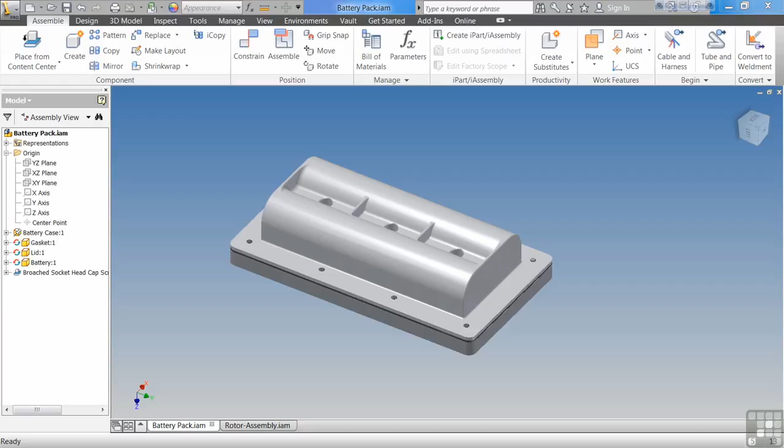In this exercise, we're going to be discussing patterning components. Let's get started. First off, I'm going to flip my battery box over here to the bottom. This is the batterypack.iam assembly drawing. I'm going to come up and I'm going to select pattern components. I'm going to select my bolt.

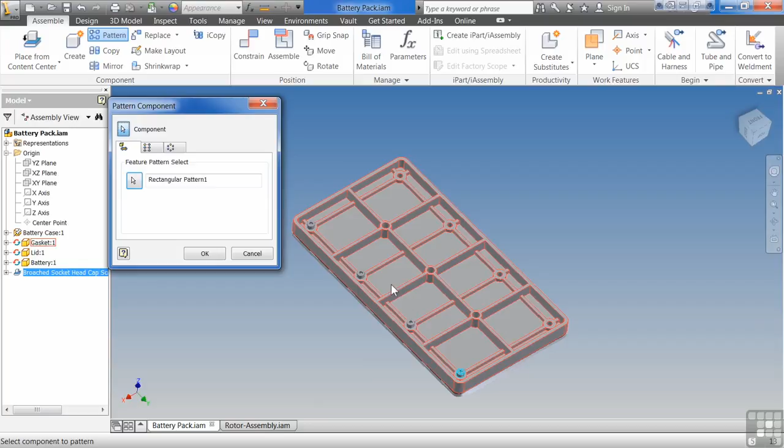Under feature pattern select, I'm going to select this arrow. And you can see it patterned this one side of the bolts. What that patterned on and what I was actually selecting was the pattern inside of this case that was used to create these holes. So it was these two holes patterned up in this one direction. You'll notice that it only did the one side.

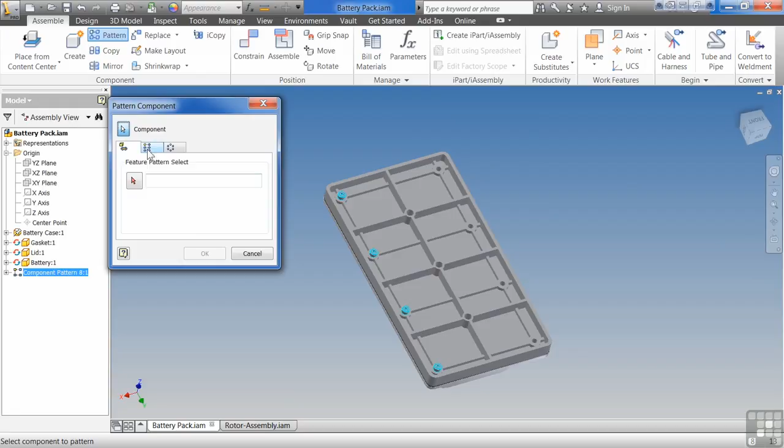Hit OK there. Go back to pattern. I can actually select the pattern, go to rectangular, select my column, and type in 3.875, and it'll pattern it over. Now, I did that to show you that you can pattern a pattern. In real life, I would have either put in two bolts to start with and pattern those, or I would have just done an X and Y pattern. What's an X and Y pattern?

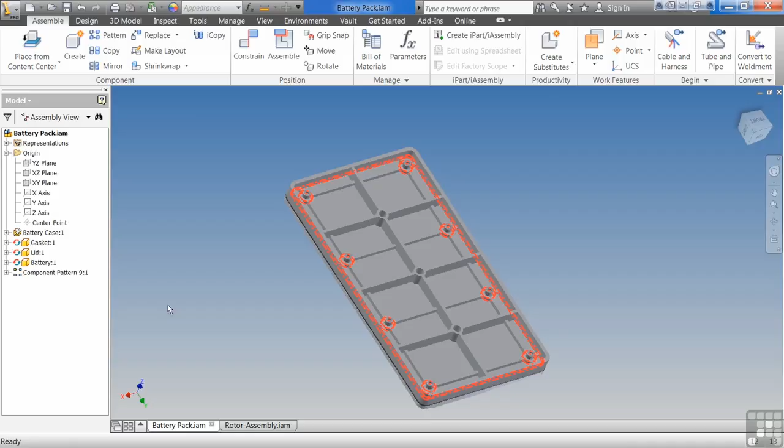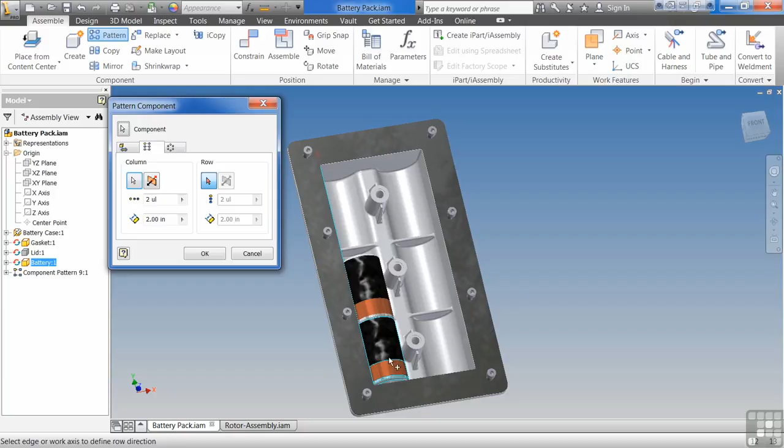Let's take a look. Turn off the visibility on the lid by right-clicking on it in the browser and selecting visibility. Let's do an X and Y pattern. Say pattern, rectangular. It's asking me for my component. Come in, I select the battery. I'm going to select the column. I'm going to go up this way, and I need 3 batteries. And I need them to be spaced so that they evenly fit in these spaces here.

But I don't know what that space is. Now I could calculate it by hand. I could go back to my original sketch. I could do a lot of hard work. But let's face it, we do CAD because it's easy. We're lazy. We don't want to have to do things. We let the computer do it for us.

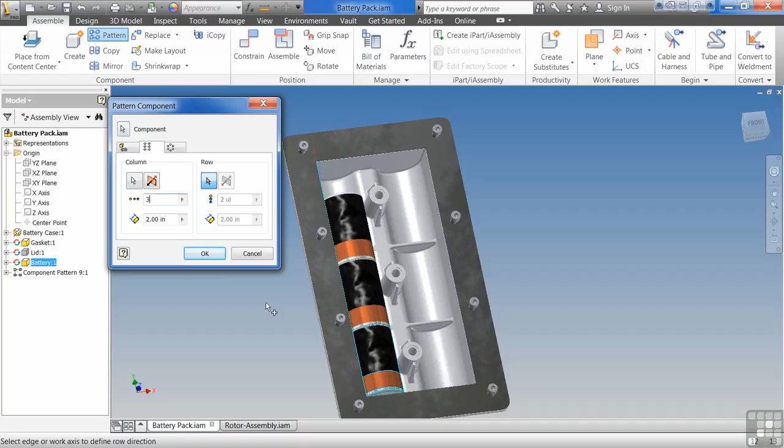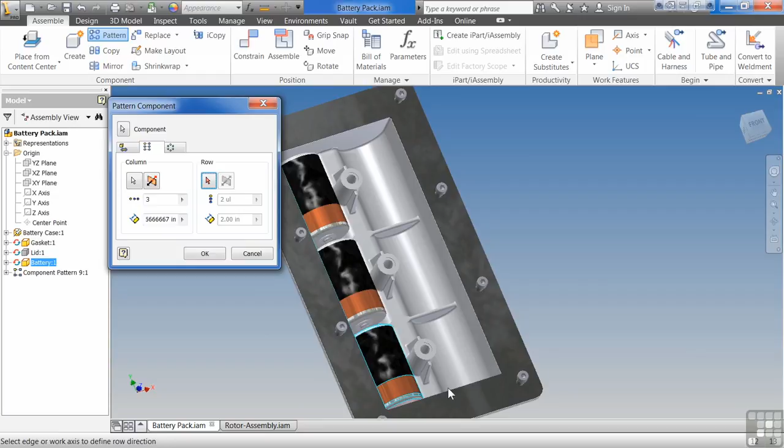Come up here, we select this little arrow, and we say measure. I selected the center point at the top of that radius. I can come over and select that exact same point up here, and then that will tell me what that space needs to be. You can see it perfectly spaced my batteries. So now I can say row, come over here. Uh-oh, went off into outer space. All I have to do is click the flip, and it'll go in the other direction.

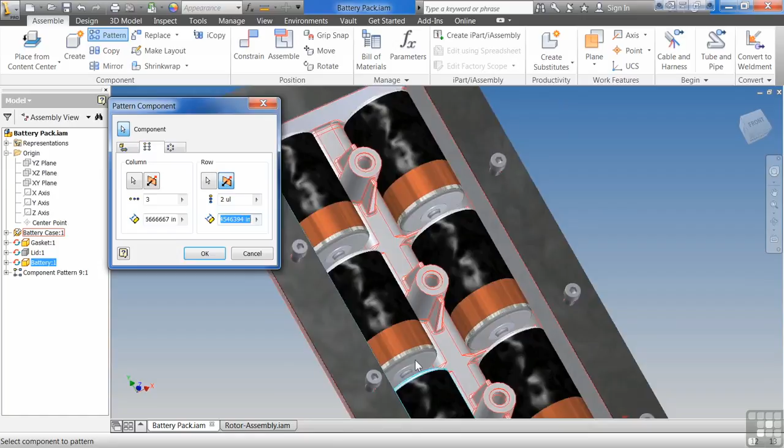And once again, I don't know what that space is, so I can just say measure. Select the top of that radius. Just make sure I get the exact same one. Really doesn't matter what radius I pick. As long as I pick the same one, it's going to evenly space them based on that. So as long as it's a like point. I didn't even have to pick the center.

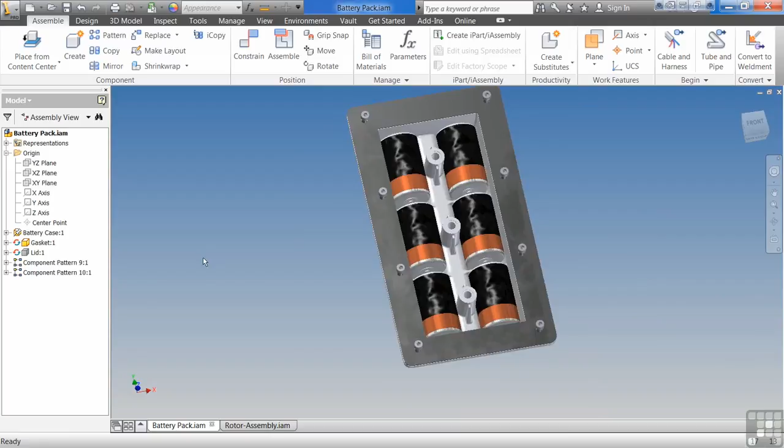I could have come in here and picked this corner here and picked the same corner over here. But I knew the centers were going to be exact. This edge here may be a little bit different than this edge over here, but the center is going to be the center. So that allows me to get my spacing in there. Say OK. So now I have my battery pack. Turn my lid back on, and my battery's good to go.

Next time you fly, be assured that your batteries are going to work in your plane.

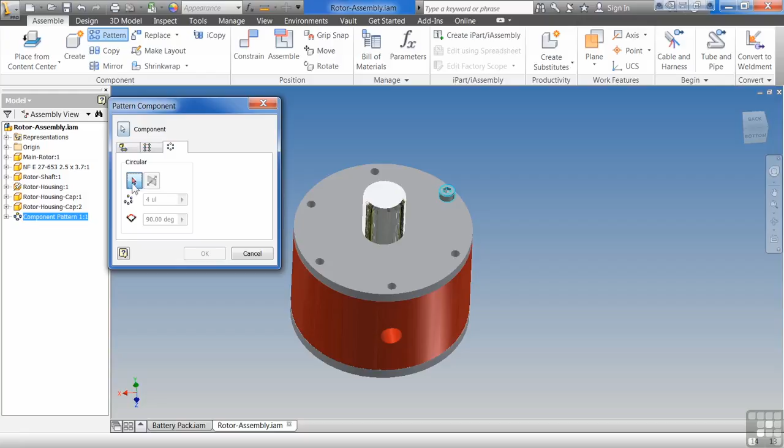Hit save. Okay. I'm going to come over here. I'm going to look at the last pattern option. Say pattern. This time I'm going to say circular pattern. I'm going to come in here and select this bolt. I'm going to select some kind of circular reference. Then I need to come in here and tell it, okay, there's 6 holes. And then I got to give them a space.

That's 6 holes at 90. These, I believe, are 60 degrees apart. And what I'm actually giving it is not the total occurrences around a circle like we have in the pattern features, but I'm giving it the distance in between these. So these are 60 degrees apart. We know that because if you take 360 and you divide it by 6, you get 60 degrees. But you can see that you can play with it. You can get different occurrences.

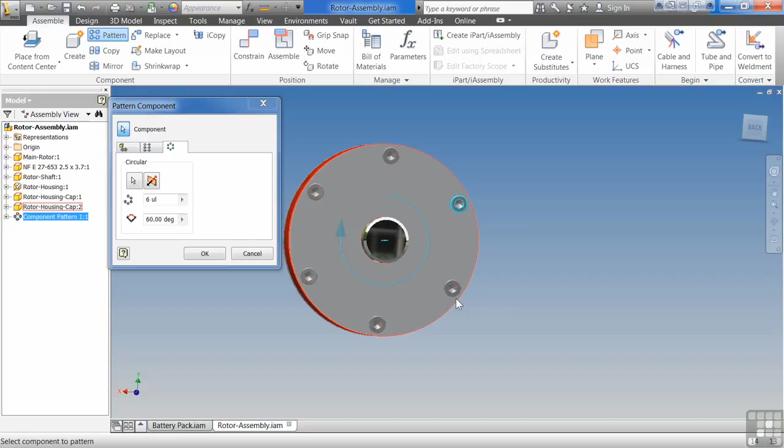To be honest with you, I don't use the circular pattern very often at all because most of the time I'll do that with the feature. And whenever you place the bolts in there, it'll automatically follow that feature pattern and do it for you. But the rectangular patterns, I do those a lot. I try to do those whenever possible. And just like where I did the pattern inside of a pattern, I try to do that whenever possible as well. I try to keep it simple. And that kind of groups things.

I like to think of the patterning like folders. Because we're not actually recreating new files here. We're just reusing the existing files. So every time I put a pattern in there, I'm reusing that exact same file over and over again. Inventor doesn't look at this as 6 bolts. It looks at it as 1 bolt in here 6 times. So think about it like that.

Play with the patterning a little bit. And see in your designs what you can do to reuse the actual bolts, nuts. Those are the easy ones. You may even have some kind of little part that you use over and over again that's repeated. Try to use the pattern to create that; it gives you a nice little folder to keep everything nice and simple. Have fun with it, play with the battery pack a little bit, and see what you can do.